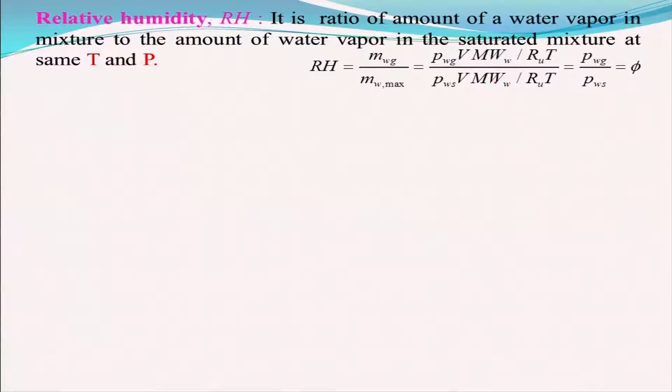By the ideal gas law, m Wg is Pwg times the volume times the molecular weight of water divided by Ru T, where Ru is the universal gas constant and T is the temperature. Similarly, the maximum water vapor moist air can hold at a particular temperature and pressure is Pws V times molecular weight of water divided by Ru T. Then the volume, molecular weight and Ru T all cancel out.

What remains is the partial pressure of water vapor in moist air divided by the saturated water vapor partial pressure. Saturated means beyond that it cannot hold more. We sometimes call it phi; relative humidity and phi are the same symbol. So it depends only on two partial pressures: the partial pressure of the water vapor, and the partial pressure of water at saturated condition in the dry air mixture.

So you can relate now the specific humidity to the relative humidity. What we can do, we will take this relationship that we know, that is SH is equal to 0.622 Pwg divided by Pa, and we know that Pa, partial pressure of air, is nothing but P, the total pressure, minus Pwg, right? And in place of Pwg, I can write down Pwg divided by Pws into Pws, and this is nothing but your what? That is your RH, right?

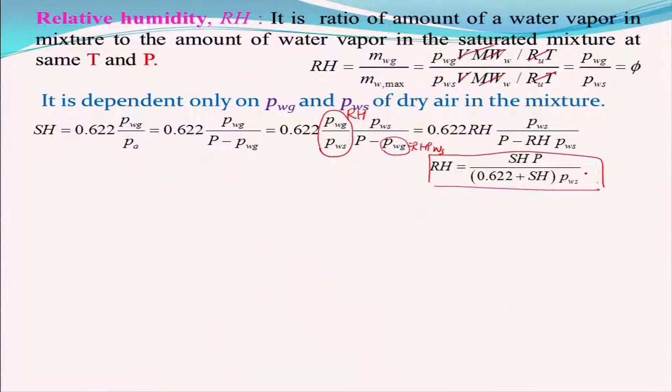So in the similar fashion, I can write down an expression. RH is equal to SH into P divided by (0.622 plus SH) Pws, right? So that is from this relation, I have just rewritten it, nothing more than that, okay?

So now we need to understand the dew point temperature, right? So what do you mean by dew? You might have observed, particularly in the summer season, if there is moisture in the air, what happens? Particularly in the early morning or late night, the temperature will be dropping down. If it drops down, what happens to the moisture? You might have observed in your day-to-day life, the grass contains a lot of water in the early morning.

Of course, you people are not getting up early morning, not going for a walk or looking at the beauty of Mother Nature. So you are deprived of that because of your own lifestyle, on an average scale. I am not saying all of you are like that. So please change your lifestyle, it is very important because life is more important than anything else.

So, coming back to that, you will get some water which is condensed, and of course, you need a surface for it to condense, that is the grass or leaves and other places. So that is nothing but your dew point temperature. Why? Because in the summer, the temperature will be high. If there is a pond or water bodies, which of course are receding at an alarming rate, not only in cities but also in rural areas, then a lot of evaporation will be taking place, right? And that will be in the atmospheric air, which we call moist air, and that will be condensed back.

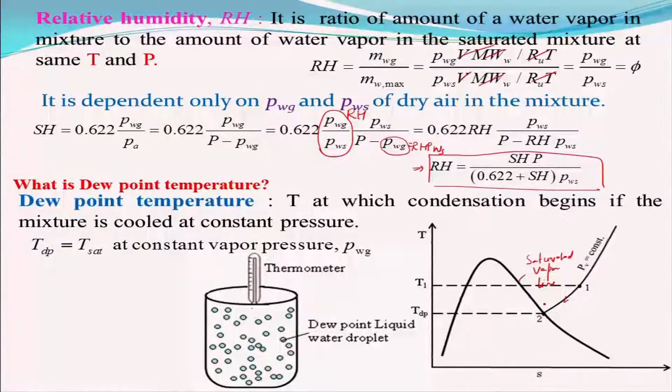And at this point, it will start condensing, right? After that, it will start condensing. It will be only vapor, but it's the point at which the vapor will start condensing, right? So that point, we call it the dew point temperature.

So let us look now at the adiabatic saturation process, where, if it is saturated and no heat is being transferred, we call it the adiabatic saturation point. So let us consider that there is moist air entering into this adiabatic saturator, right? That means no heat is going out here, zero anywhere, right? And it is having a certain temperature. And of course, this is moist air. It will be containing a certain amount of air, and also some vapor.

It is having some specific humidity, let's say station 1, so therefore I am giving SH1, and relative humidity. And then when it comes in contact with this liquid water, what will happen? Some water vapor will be carried over by this air, and it will be long enough so that at this point it will be saturated, or almost saturated. Saturated means it cannot take more moisture at that temperature.

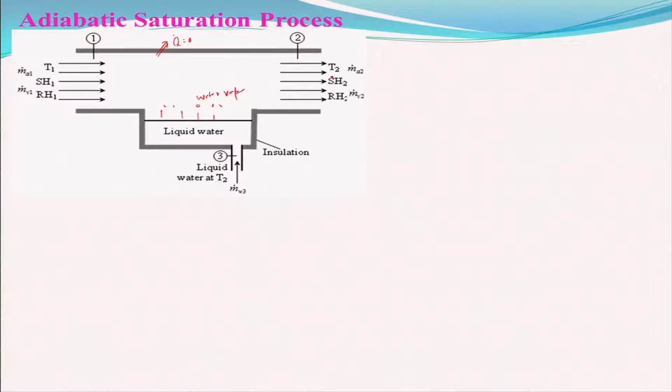If it is saturated, from the definition of relative humidity, which is nothing but the ratio of mass of water vapor divided by the saturated mass of water vapor, it is the same. So RH2 will be equal to 1, right? Okay. So do you find this application anywhere?

See, if you go to Fatehpur Sikri, the fort, please visit there. In earlier days it was very hot. They had water channels which would make it cool, so the king, the queen or the other people would be in a comfortable zone. So in ancient times, people may not have known what we are talking about in class, but they knew how to design and develop. Not only that, you can go to several earlier forts and you will find a lot of science and technology there.

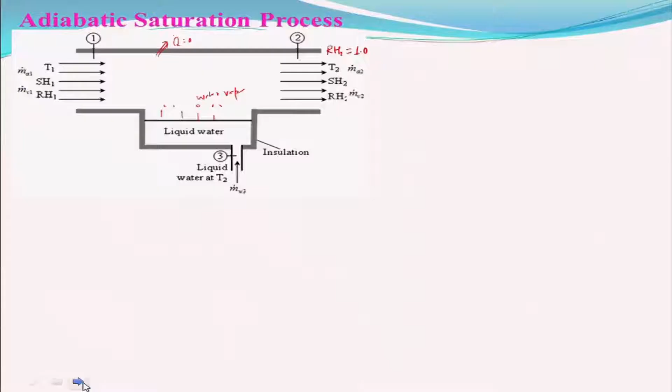So let us now look at how to analyze it. As I told, if the mixture becomes saturated, and here we give enough length of water in contact with the air entering the adiabatic saturator such that it will be saturated at the end, then the temperature of the mixture at its exit is termed the adiabatic saturation temperature. The temperature attained, let's say T2, is basically the adiabatic saturation temperature.

So is it different from your dew point temperature? Yes or no? Will it be different or the same? We will see that; please think about it. So we want to analyze this. We will make standard assumptions: steady flow process, change in kinetic energy is 0, change in potential energy is 0, and there is no shaft work. Are you giving any shaft work or power? No. So shaft work will be 0.

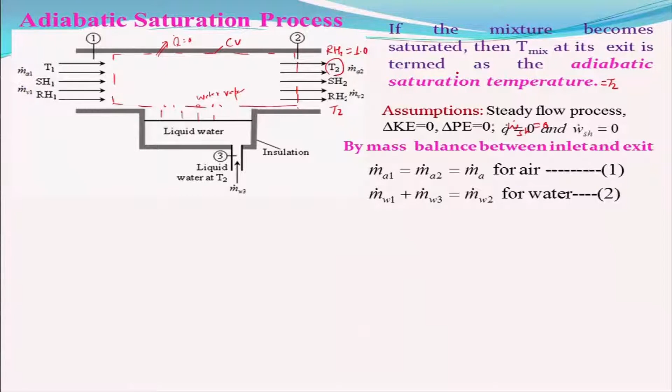Similarly, we will do the energy balance: the summation of the enthalpy at the inlet is equal to the summation of the enthalpy at the exit. The left hand side is inlet and the right hand side is your exit. How many inlets are there here? In this case there are 2, station 1 and station 3. And the exit is only 1, that is station 2.

So we can write down this energy balance: m dot A1 into HA1, the enthalpy of the air which is entering, plus m dot Wg, the water vapor mass flow rate, into Hwg at station 1, plus the enthalpy due to liquid water entering into this container, is equal to the enthalpy exiting from this adiabatic saturator, that is m dot A2 into HA2 plus m dot Wg2 Hwg2, the enthalpy due to water vapor.

So we will combine these values from the mass balance and then simplify it. If I divide this whole thing by m dot A1, this will cancel out. We know that m dot A1 is equal to m dot A2, so this will cancel out and become 1. Why? Because m dot A1 is equal to m dot A2 from the air balance we have done. So similarly here also we can write m dot A2.

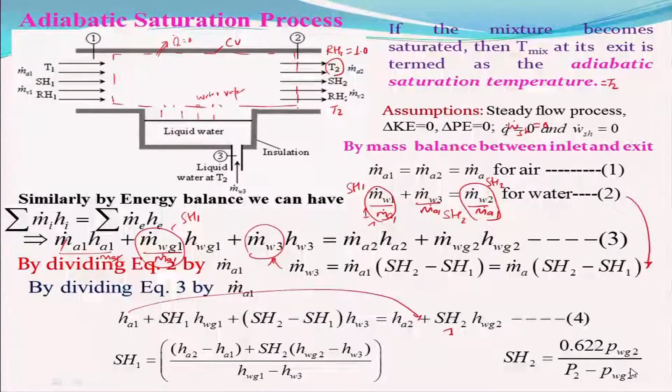And this hw3, what values is it corresponding to? That is nothing but your HWF2, right? Because at the same temperature it will be saturated liquid, therefore at temperature T2. So this portion will be nothing but HF2 at T2, right? And in a similar way, I can replace this thing here with HWF2.

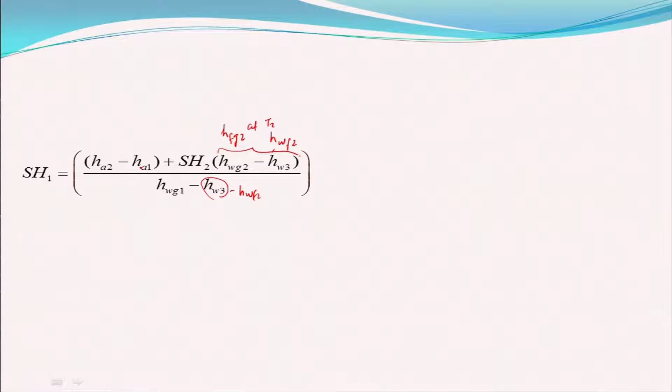And because this is about the air, I can say that Cp is remaining constant, it's not changing with the change in temperature. So therefore, I can write down that SH1 is equal to Cp into T2 minus T1 plus SH2 into HFG2, divided by HWG1 minus HWF2.

So if I know the Cp value, for air you can take 1.005 kilojoule per kg Kelvin, and T2 and T1 if you know the temperature, then you can find it out easily, and SH2 you can find out very easily provided you know the temperature. And HFG you can get from the steam table, and all these values you can get, and then we can calculate very easily.

So as I was telling, this is the dew point temperature, where the temperature is changing. Whereas the adiabatic saturation temperature takes this path, and it will be a different temperature, because the heat is not going out, therefore it will be a little higher temperature as compared to the dew point temperature.

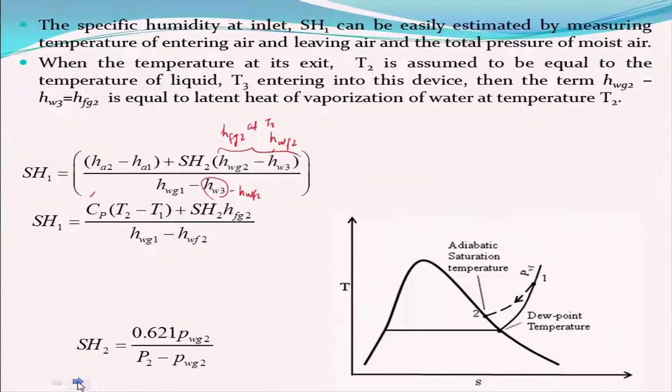So we will see how we can apply these equations for finding out the various properties. We can take an example and look at it. But before that, let us ask a question: what do we mean by psychrometer? Because we want to find out the wet bulb temperature and the dry bulb temperature, so that we can find out the relative humidity, the specific humidity, and other things.

If you recall, we had discussed wet bulb temperature, the temperature corresponding to the moist air. And we can have a device for this, with air going here. When you put a glass bulb thermometer, that will give me the dry bulb temperature. But if I put it into a liquid with a cotton or wick, with moist air, that will give me the wet bulb temperature.

Of course you need to suck the air at a particular velocity so that it won't get affected. That is what people use in the laboratory to have a very precise measurement of the dry bulb temperature and the wet bulb temperature. And this is known as a psychrometer, because once you know this, you can find out very easily the relative humidity, the specific humidity, and other things.

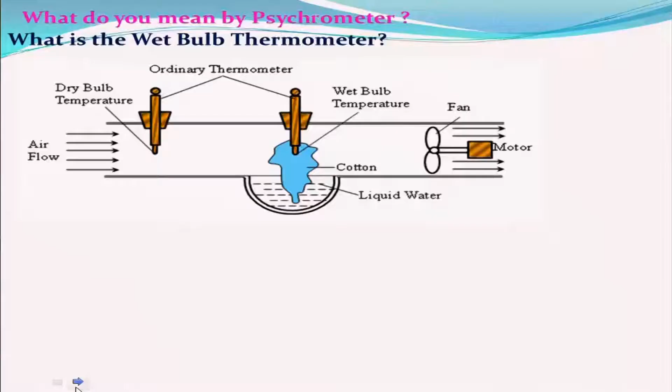So of course, if you look at this wet bulb temperature, it depends on the rate of mass and energy transfer, and of course the radiation heat transfer from the surroundings. One has to take care of that. But here it won't be, because this temperature won't be that high, so there won't be radiation. There are no other heat sources, and we will see that this can be done very simply using thermometers, which we will be discussing in a very simple way.

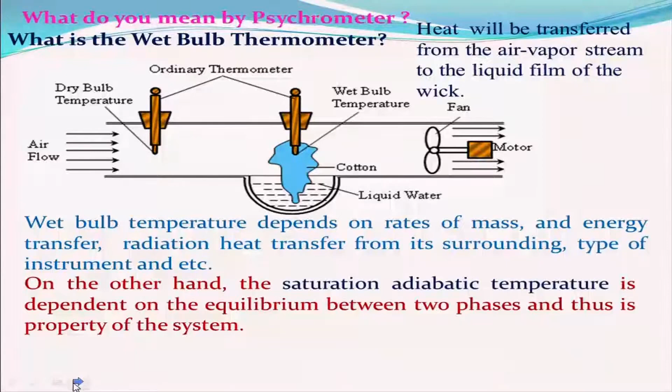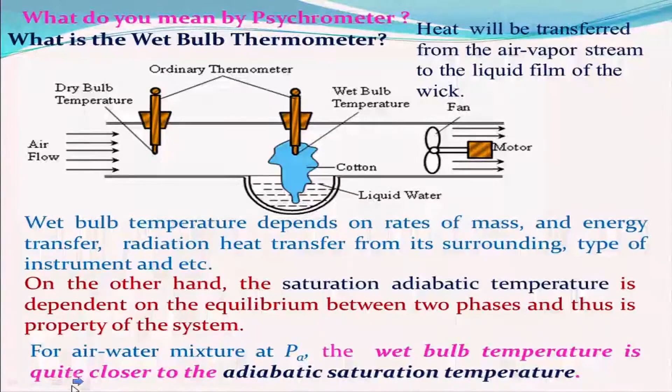On the other hand, if you compare this with the wet bulb temperature, the adiabatic saturation temperature is dependent on the equilibrium between the two phases, thus it is a property of the system, right? Therefore the adiabatic saturation temperature is basically a property, and it will be closer to what we call wet bulb temperature. And for an air-water mixture, the wet bulb temperature is quite close to the adiabatic saturation temperature, right? Wet bulb temperature is closer.

That is a complex system I looked at, but you might have seen these thermometers in your laboratory. There is one thermometer here which will give me the dry bulb temperature, right? And this wick is there, which you have to moisten, like the cotton, and that will give me the wet bulb temperature. You might have seen this in any laboratory.

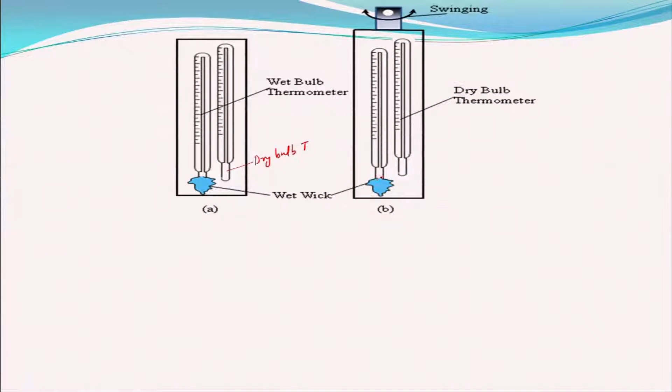However, it may not give the right temperature for the wet bulb. So what people do is swing it, rotate it, so that there will be some velocity of the air, and some vaporization of water will take place, so heat will be taken out, and it will be saturated, right? And it will give you the wet bulb temperature. Let us see how we can use that. We will take this example.

Let's say a sling thermometer is used to measure the dry and wet bulb temperature of air at 100 kPa, and the dry bulb temperature is 40 degrees Celsius and wet bulb temperature 30 degrees Celsius, and we need to find out specific humidity, relative humidity, and enthalpy of the humid mixture. And keep in mind that the thermometer which is rotated, we call it the sling thermometer. This is being used to measure that.

Now, how to go about this? What is given? The dry bulb temperature is given as 40 degrees Celsius, right? And wet bulb temperature is given as 30 degrees Celsius. And of course, the pressure is given, 100 kilopascal. And we have to find out SH, RH and also HM, the enthalpy of the humid air mixture. So, how to go about it?

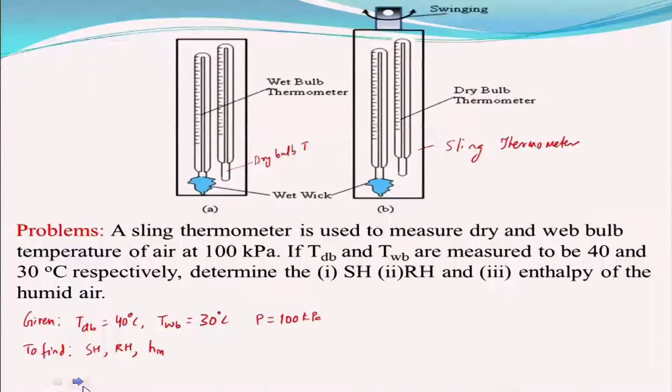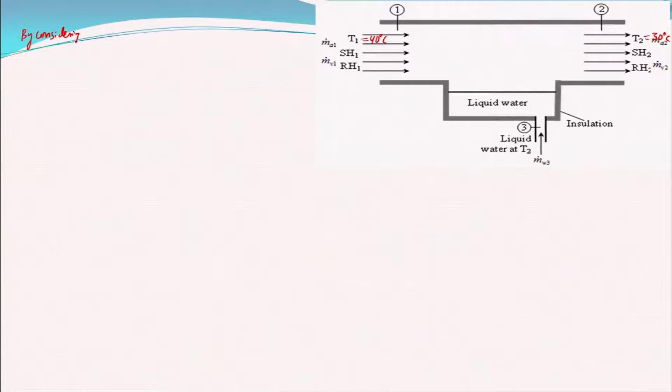As I told, this is the sling thermometer, but we can assume it is basically an adiabatic saturation process. If we do that, T1 is equal to 40 degrees Celsius and T2 is equal to 30 degrees Celsius. We need to find SH1 of the moist air entering the adiabatic saturator, by considering the adiabatic saturator at temperature 30 degrees.

We have already seen SH1 is equal to Cp(T2 minus T1) plus SH2 HFG2, divided by HWG1 minus HWF2. T2 is given, 30 degrees Celsius, T1 is given, Cp you can take as air Cp, that is 1.005 kilojoule per kg Kelvin, and we need to find out SH2, which is not known, and HFG2, HW1 and HF2, all those things we need to find out. But how to go about them?

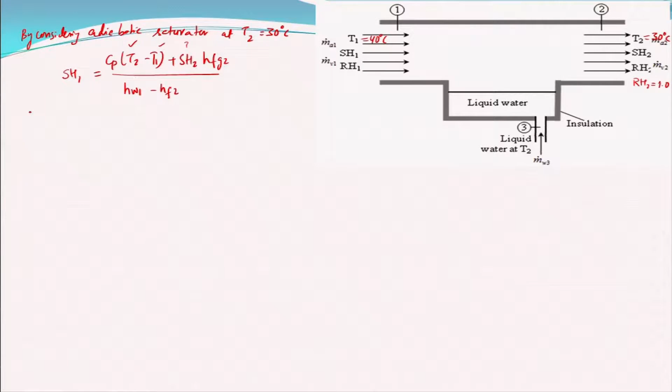How we will get SH2? Because we know that RH2 is equal to 1, that means it is saturated condition at station 2. That means PWG2 is equal to PWS2, that is saturated condition. Now, if I know these things, that is what is happening at 30 degrees Celsius.

So, if I know RH2, can I find out the SH2? I can find out very easily. So, let us take the properties of this, because I need to know this. SH2 we know is equal to 0.622 PWG2 divided by P minus PWG2. Now, what is this PWS2? If I know this, then I can get it very easily. PWS2 is equal to PWG2, partial pressure of the water vapor at station 2. So, for that we need to use the saturated steam table.

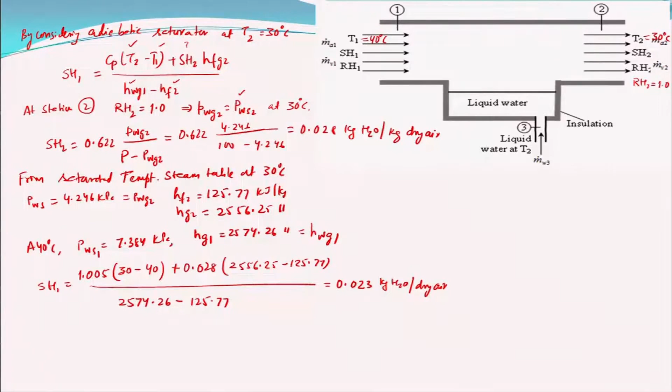And once we know this SH1, I can find out RH1 very easily. We know SH1 is 0.622 PWG1 divided by P minus PWG1. Of course, you can use the other formula, but this is the simpler one. Because we know SH1 is 0.023, I can get PWG1 is equal to 3.67 kilopascal. So RH1 is nothing but PWG1 by PWS1, which is 7.384. You will get 0.497.

And we need to evaluate now HM1, that is nothing but HA1 plus SH1 HWG1, which is equal to Cp 1.005 into 40 degrees Celsius, plus SH1, 0.023, into HWG1, that is 2574.26, which will be equal to 101.2 kilojoule per kg.

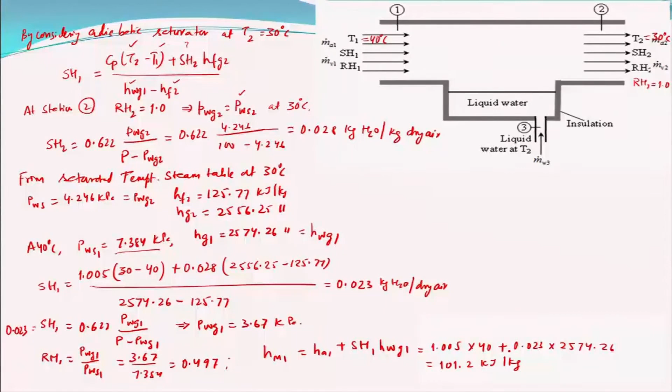So you can get all these values. The question arises: you have to do all this calculation to find out these properties, but is there any simpler way of doing it? How we can use a chart to find them out very quickly, we will see in the next class.